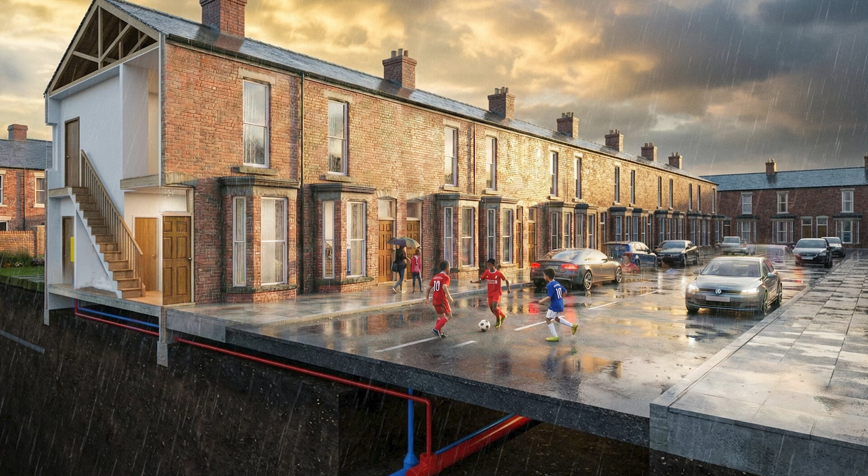This video describes a conceptual model for small, repeatable heat networks. Developed on behalf of Liverpool City Council, this work was funded by Innovate UK, a part of UKRI.

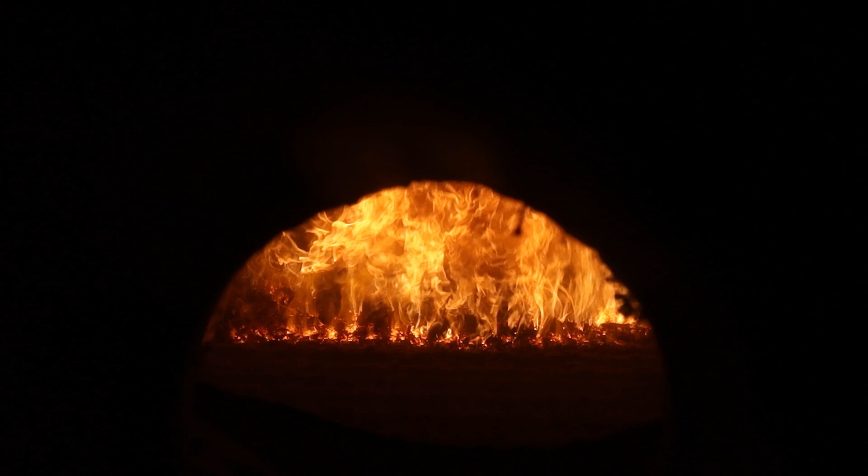What is a heat network? Heat networks have existed in the UK since the 1970s, although their adoption has been relatively limited, in part due to needing a high density of consumers. Generally, they have used large-scale fossil fuel boilers as the heat source, although some are now converting to lower carbon technologies, such as heat pumps.

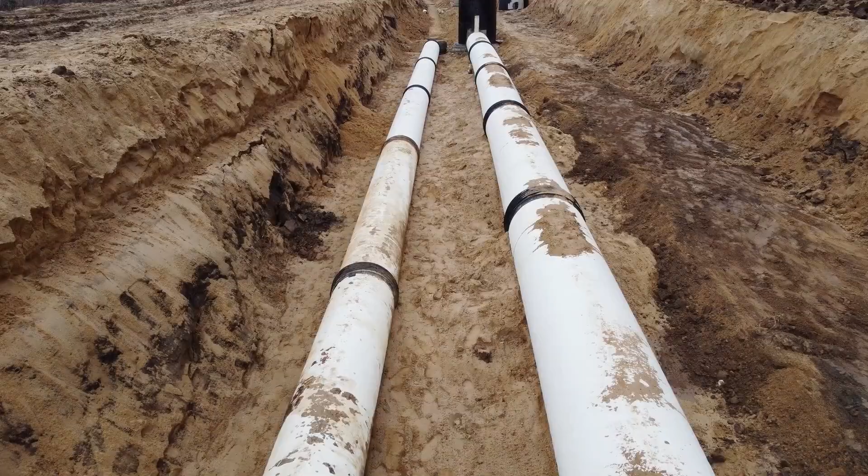Heat is generated at an energy centre, then distributed to consumers in the form of hot water through a network of highly insulated pipes. The heat is transferred, using special equipment within the property, to serve the consumer's own heating system and hot water outlets. This process results in cooling of the network water, which is returned back to the energy centre for reheating.

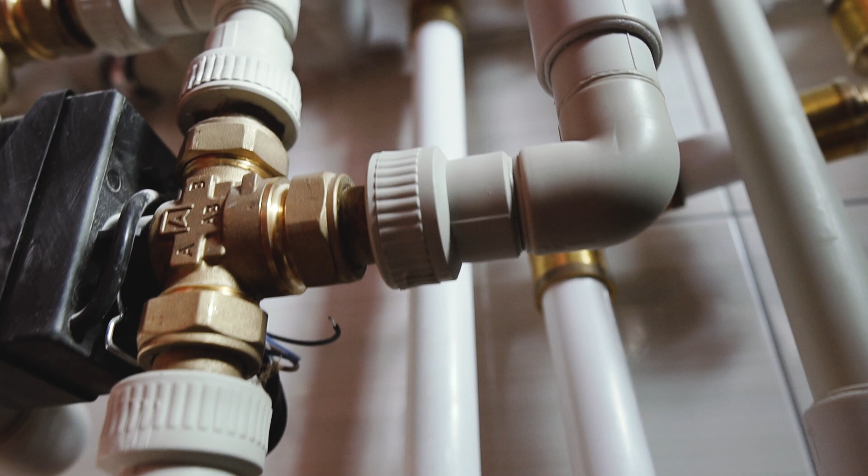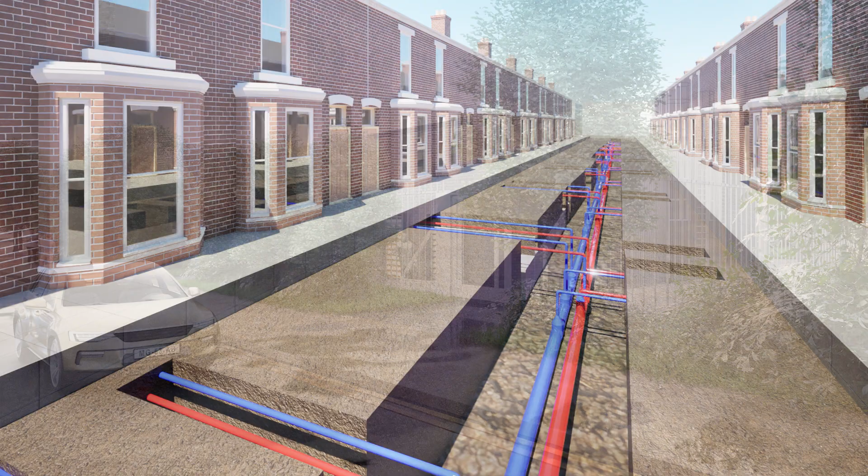The conceptual model, an introduction. As the name implies, our conceptual model for small, repeatable heat networks takes a different approach than large-scale heat networks. Our heat networks would start at a local level, using small energy centres that utilise low-carbon technologies such as heat pumps. They would be supported by an ambient loop, which can expand over time, using waste heat and naturally occurring heat to increase the water temperature used by each energy centre.

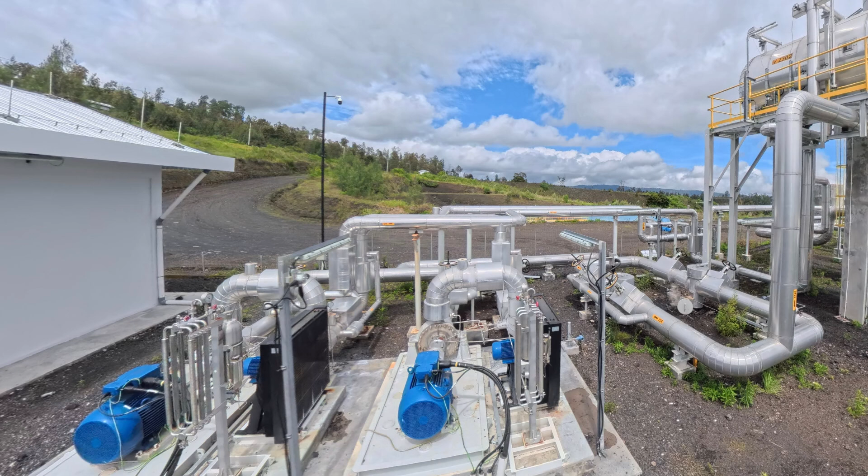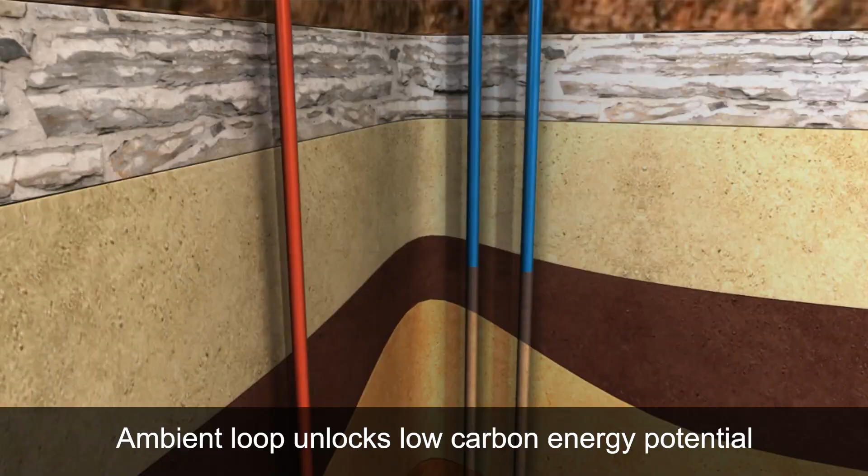There are several key benefits to this approach, including efficiency through repetition. Networks can grow over time. The approach would be applicable to many areas, not just large cities. The ambient loop would unlock low-carbon energy potential in the UK, maximising heat storage and reuse. It would reduce peak energy demand on the electricity network, reduce cost and investment risk, and it would support local supply chains and create jobs.

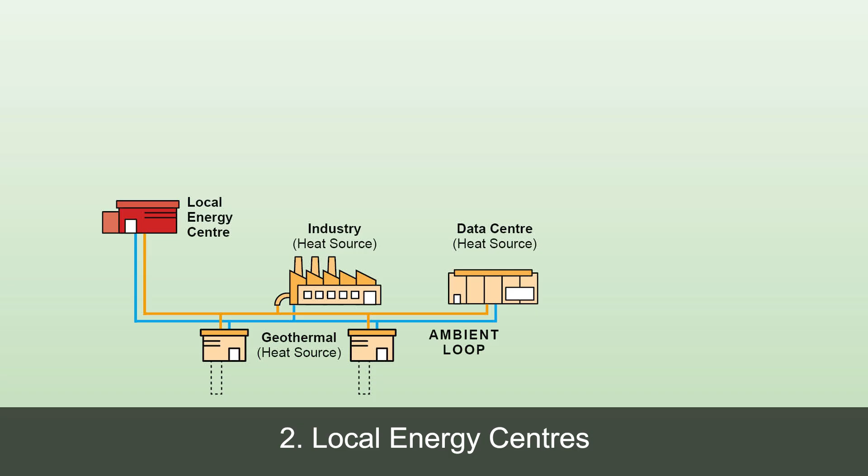The conceptual model overview. The conceptual model consists of the following 4 components. 1. The ambient loop, including heat sources. 2. Local energy centres. 3. Local networks. 4. Customer connections.

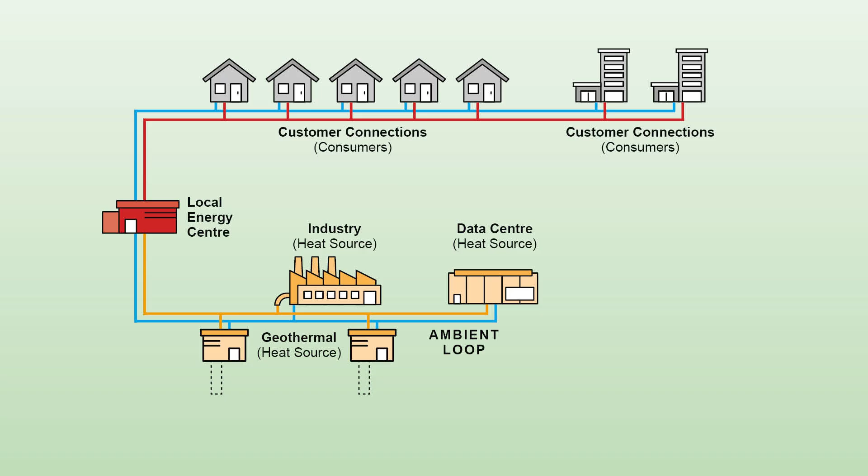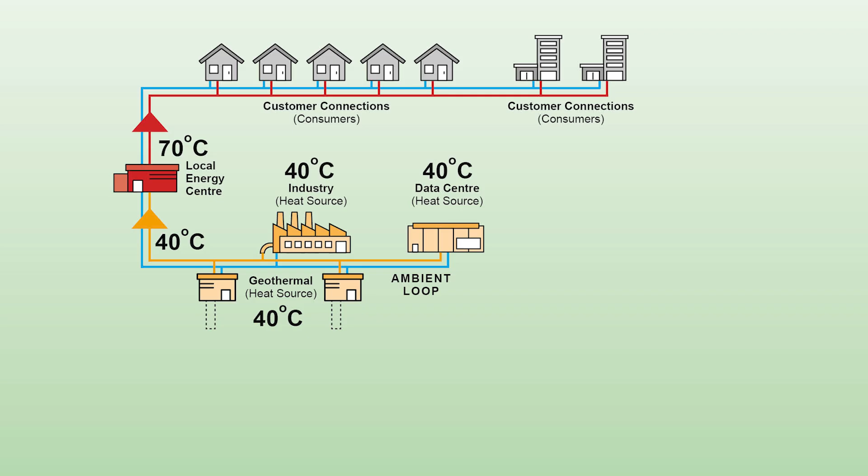What is an ambient loop and how is it used? An ambient loop is a buried pipe network that carries lower temperature water, warmed by natural or waste heat, to heat pumps, which can upgrade this heat to central heating and domestic hot water temperatures. In the conceptual model, the ambient loop is used to transport heat from naturally occurring heat sources, such as geothermal energy, and waste heat sources, such as data centres. This heat, which is already at 40 degrees Celsius, is delivered to the local energy centre's heat pumps, which boost this water temperature to 70 degrees Celsius, with an efficiency of over 450%. The ambient loop may serve more than 20 local energy centres.

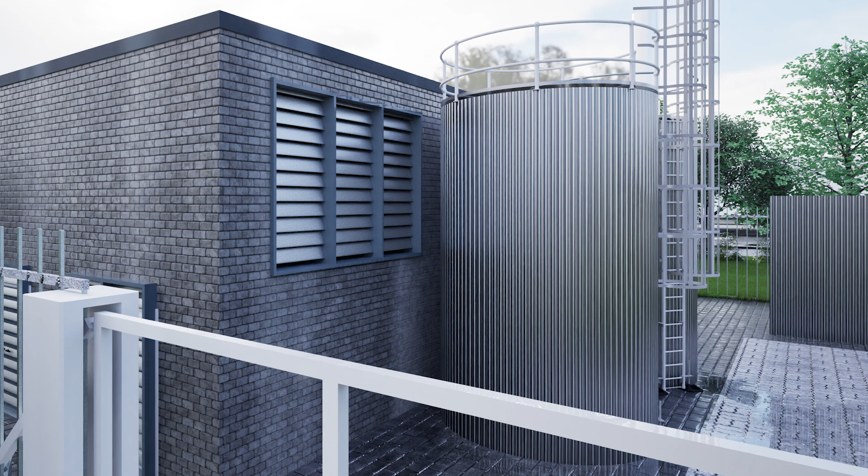How does the energy centre work? The energy centre has a number of key components. Low-carbon water source heat pumps, providing roughly 95% of the heat, using the ambient loop as a heat source. Gas boilers, which provide around 5% of overall heat, supporting peak demand requirements and available to provide full 100% heating system backup. Thermal stores, which act like a thermos flask, to reduce heat loss in stored water and help balance demand. In addition, there is various ancillary equipment, such as pipework, valves, electrical equipment, and backup systems.

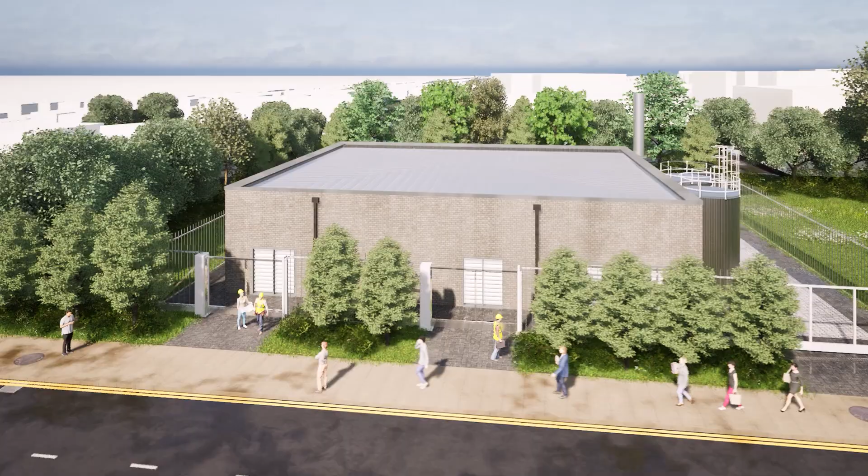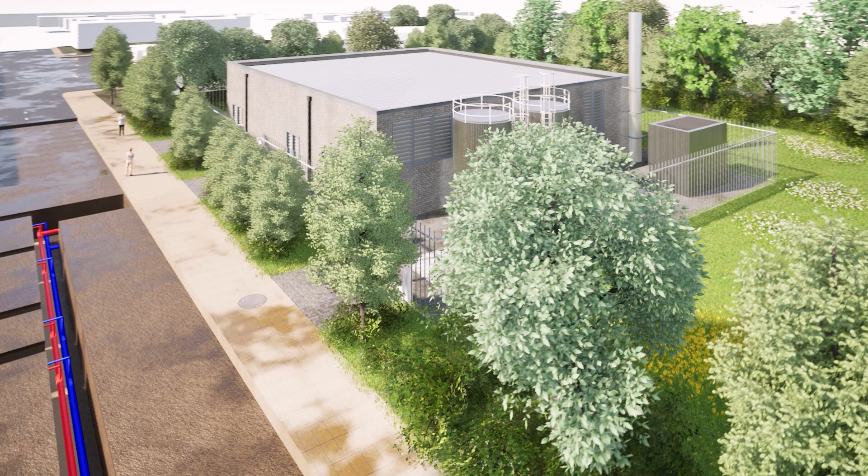Energy centres will be small in scale, rather than large industrial complexes, so they can work at a neighbourhood level, without needing a large physical footprint. By taking in pre-warmed water from the ambient loop, already at 40 degrees Celsius, and by using primarily heat pump technology powered by low-carbon electricity, the energy centre is a highly efficient, low-carbon method to deliver heat energy at a local level.

The local network. A network of highly insulated buried pipes distributes the 70 degrees Celsius water from the energy centre to each customer's property. Each local network is expected to serve 800 to 1,400 customers, depending on the mix of customer types. This pipework delivers hot water and returns used, cooler water back to the energy centre for reheating.

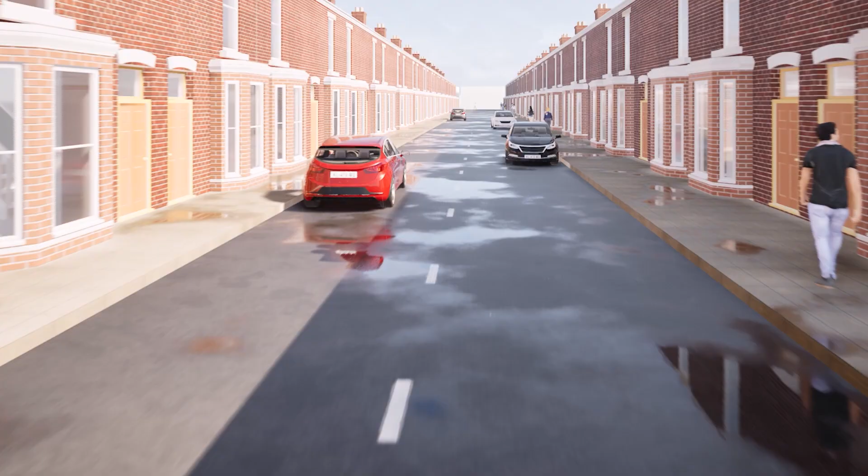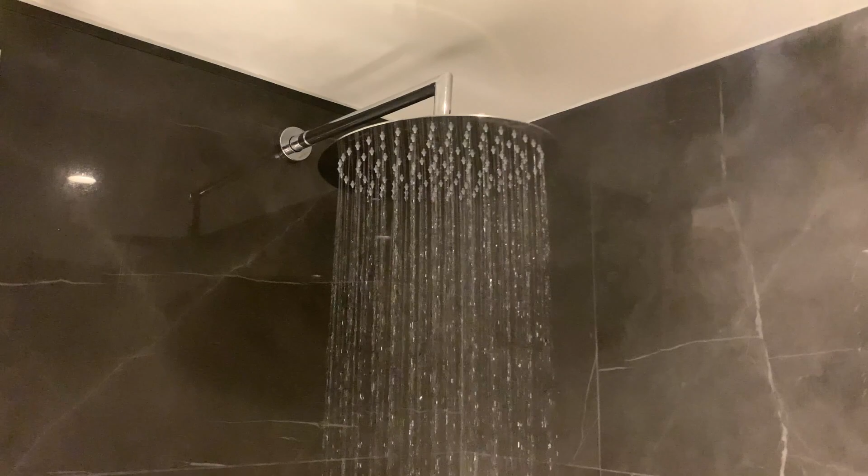What happens in a property? Each connected property will contain equipment similar in size to a gas boiler, called a heat interface unit. The heat interface unit transfers heat from the network to the building's own heating systems and hot water outlets. The building's water and heating system is isolated from the heat network, meaning that the distributed water is not physically used, only its heat energy is transferred to the property.

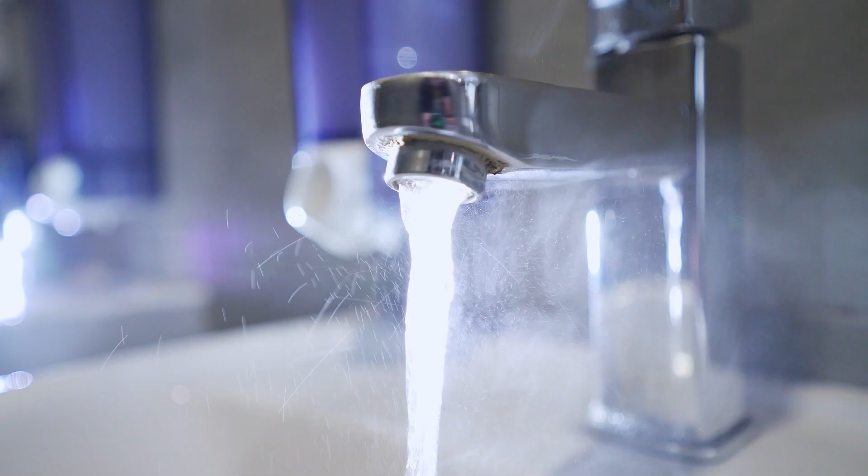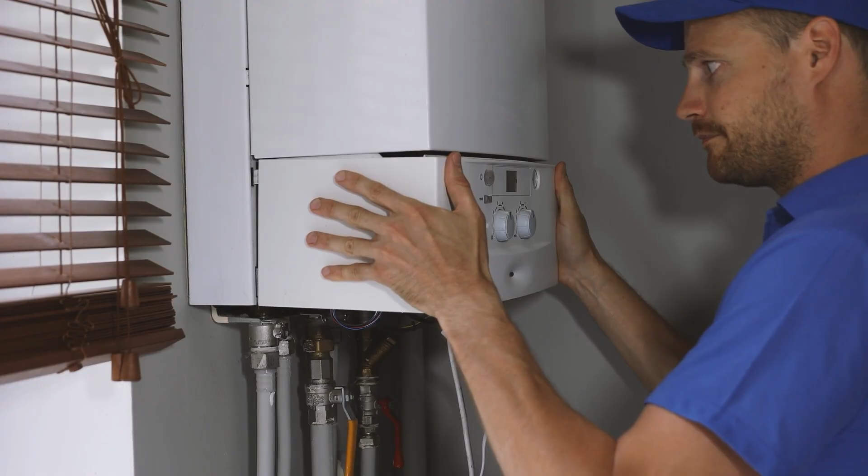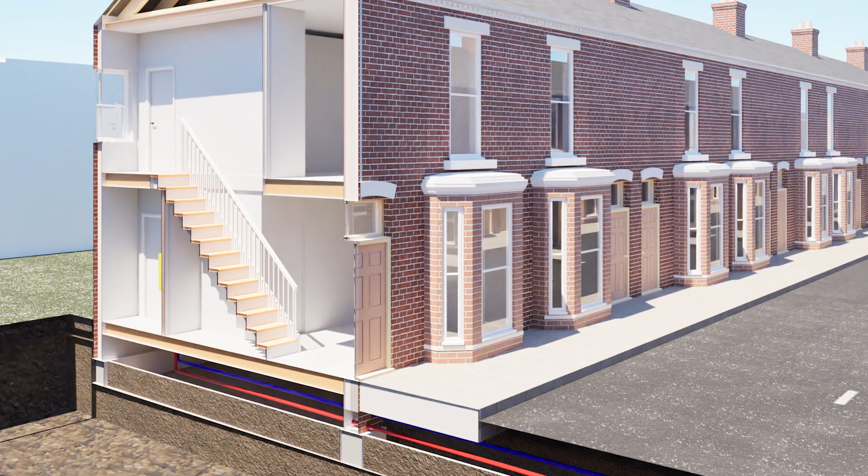The heat interface unit also incorporates a meter to measure heat use, so that customers can be billed for the heat they use. Heat interface units have the advantage of being a direct replacement for existing combi boilers, as their size and 70 degrees Celsius output temperature match the required characteristics. This means that heat outputs are similar to traditional boilers, meaning there is no need for additional building insulation and can use existing radiator systems.

What makes this low carbon? There are many sources of ambient heat which could potentially be utilized to supply warm water to the energy centre. One example is our sewerage systems, which contain waste heat from hot water used in homes, which can be transmitted to the ambient loop through heat transfer technology. Another example is waste heat generated by data centres, which can be captured.

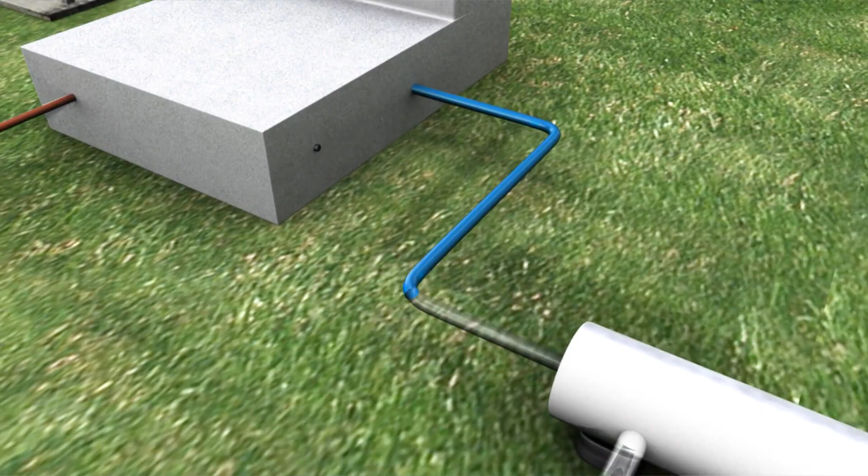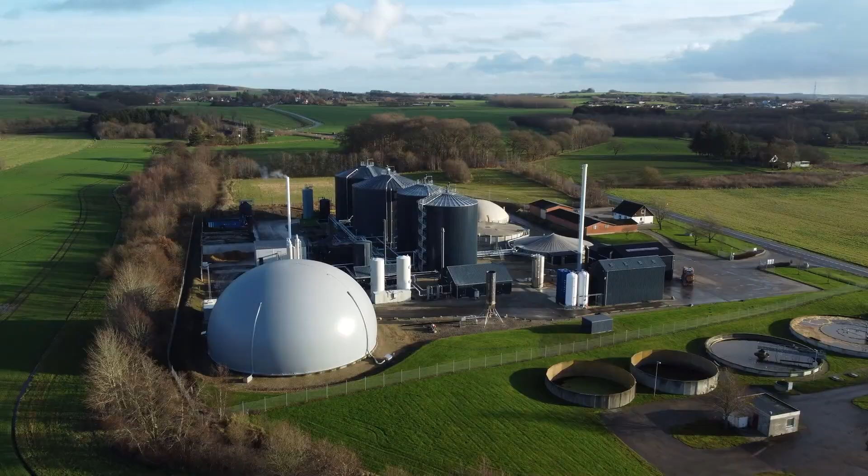A main contributor to the ambient loop is expected to be geothermal energy, which is widely available, low carbon, and can achieve higher temperatures than other forms of natural heat. Sources can be added to the heat network's ambient loop as it expands, spreading capital investment over time. By making better use of naturally occurring or waste heat, the ambient loop can significantly improve efficiency, electricity use, and carbon emissions.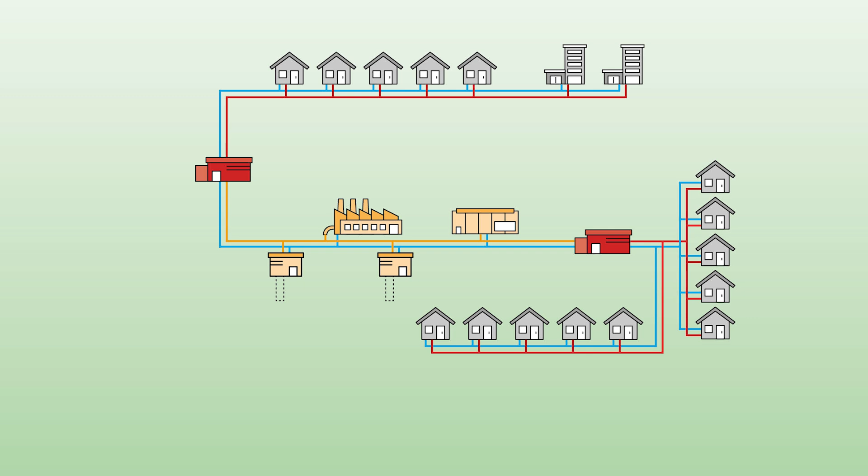A repeatable approach to expansion. The local energy centres will all follow the same core design, so that economies of scale can be achieved, with a high cut-and-paste approach to their design and build. This approach reduces both cost and time during construction, and improves operation and maintenance through common equipment and replacement parts. Each local energy centre can gradually develop in line with demand for customer connections, with the local network growing until it reaches its limit of between 800 and 1,400 customers.

The other local energy centres can develop separately to provide heat to adjacent areas, with the ambient loop growing to supply each new local energy centre. This repetition allows groups of local networks to combine and operate at a town scale. Multiple town-scale networks can then develop, ultimately allowing the small, repeatable heat networks to provide low-carbon heating and hot water at a city-wide scale.

Further information available. Further work relating to the conceptual model includes a detailed report on the concept of small, repeatable heat networks, a hypothetical study into the application of the concept in the Newsham Park area of Liverpool, and a Liverpool-scale conceptual model master plan.